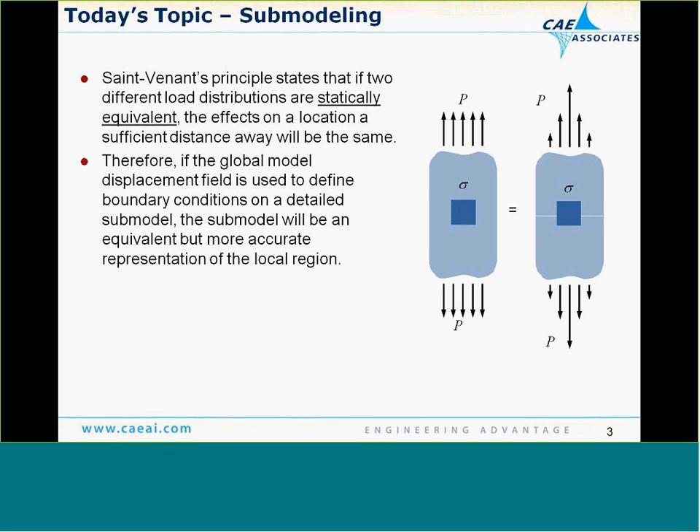Basic characteristics of submodeling, if you're not familiar with it: the submodel is a separate analysis, or separate model, from the global model. The sub typically only includes the local area of interest. So you're going to go to your global result, take a look at a particular region for stress, say, okay, I'd like to get some more resolution in that region, and slice a piece of the model out from that area.

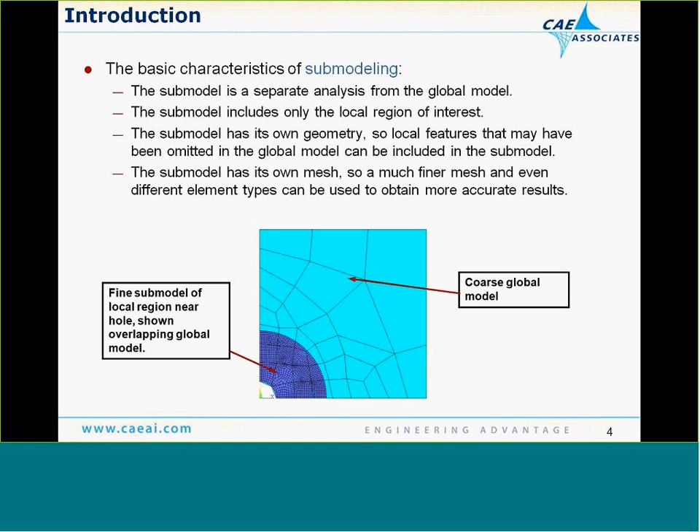It has to be geometrically in the same location because we're going to be interpolating displacements based on nodal coordinates. We're going to remesh that geometry with a finer mesh, interpolate those global displacements onto the finer mesh, and then generate our submodel solution. That's really what we'll be doing today in the presentation.

Submodeling has been available in mechanical APDL, or what we refer to as the ANSYS Classic interface, for a long, long time. Submodeling was possible in Workbench, but prior to the release of version 14.5, it required APDL command blocks to accomplish the cut boundary interpolation. There were two solution phases involved where you had to write out files and then read files back in. It worked reasonably well, and followed the same basic procedure we use in mechanical APDL, but it was a little bit cumbersome.

One of the things about version 14.5 is that they've reduced that effort to simple drag and drop operations. We can have our global model and our submodel inside the same project. That's highly advantageous because we can simply make a duplicate of our global model and then edit that geometry locally to extract the submodel region. Then when we're ready to interpolate those boundary conditions, we grab the solution row from the global model, drag it, and drop it onto the setup row of the submodel. That's what we'll be doing today.

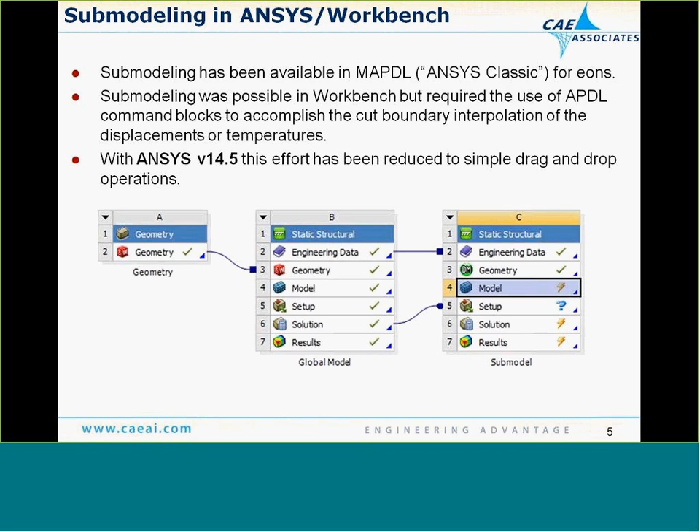The basic procedure for submodeling in the Workbench environment consists of the following steps. We're going to set up and run our global model the way we normally would, then either bring in separate geometry or make a copy of our global model and extract the geometry that we want.

The requirement here is that this geometry has to be in the same geometric location as it was in the global model. We're going to drag up and interpolate the global displacement fields onto the cut boundaries of our submodel, then evaluate the submodel boundary locations. You have to be fairly sensitive to this when doing submodeling, making sure you are far enough away from the region of interest.

So that the cut boundary interpolation of those displacements isn't affecting the localized response. We're going to talk about two different ways to compare force and stress at those cut boundary locations to the global model. There are some nice new tools in version 14.5 which allow you to evaluate that fairly readily. Then, when you're confident that your cut boundaries are in an appropriate location, you can simply go in and evaluate the submodel results the way you normally would with another model.

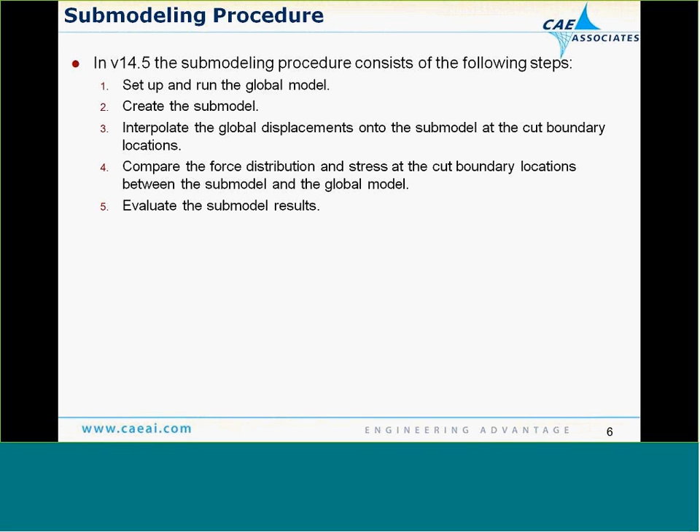In the global model in the upper left, you can see we have a fairly coarse brick mesh, and we have a reentrant corner or sharp edge in the region where we're looking at a high stress in that global result. Now we know based on experience that we can't evaluate the stress accurately in the global model in its current geometric condition, because at a reentrant corner that stress is going to be infinite.

So what we need to do is go back and fill in that region with some geometry, like a fillet radius or tooling radius, something that would actually occur in the real part. The reality is we can't make or manufacture anything with a reentrant corner in it - it has to have some small fillet radius. We need to go back and put that in to evaluate the stress accurately.

On the right-hand corner, we're showing our submodel stress distribution, and we've even switched element type. So we go in, add the fillet, remesh in a much finer state with a tetrahedral element compared to the original brick element, and we're able to share those global boundary conditions to very clearly evaluate the submodel.

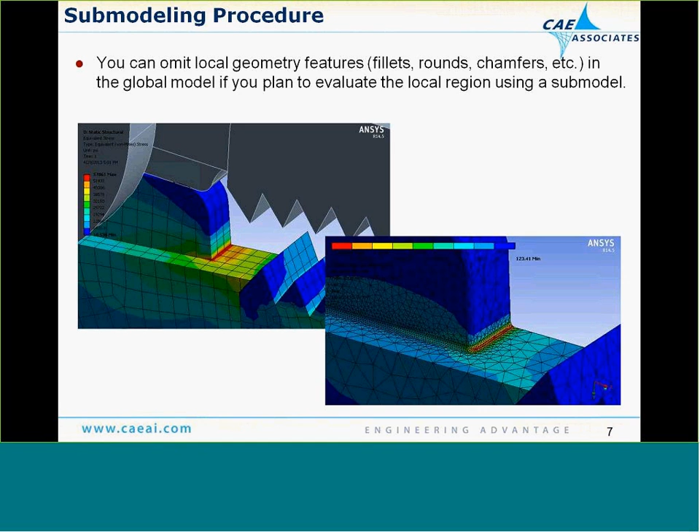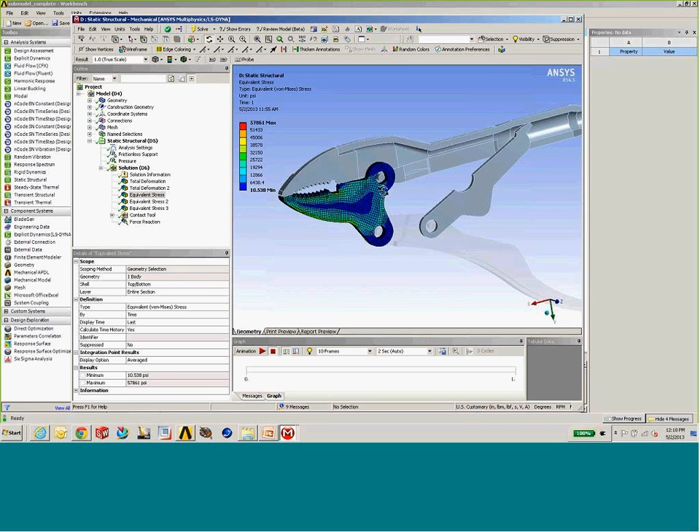So I'm going to go over now to the ANSYS mechanical environment, and let me just bring up my global model here to give you a quick idea of what we're doing. Some of you have seen this before if you've attended our update seminars. We have an assembly of essentially a grip or a plier, and we've applied load to this such that we end up with this high stress right at that reentrant corner where we're missing that fillet.

So my options for evaluating this type of situation are basically two. I can refine the geometry in the global model and regenerate the entire global solution - not really a big deal with this model since it's not terribly large, but for a very big, complex assembly I may not want to do that. I may want to run that global analysis one time and then utilize those cut boundaries to evaluate the stress, and maybe even do a refinement study on a local level using the submodel. That's what we're going to do today.

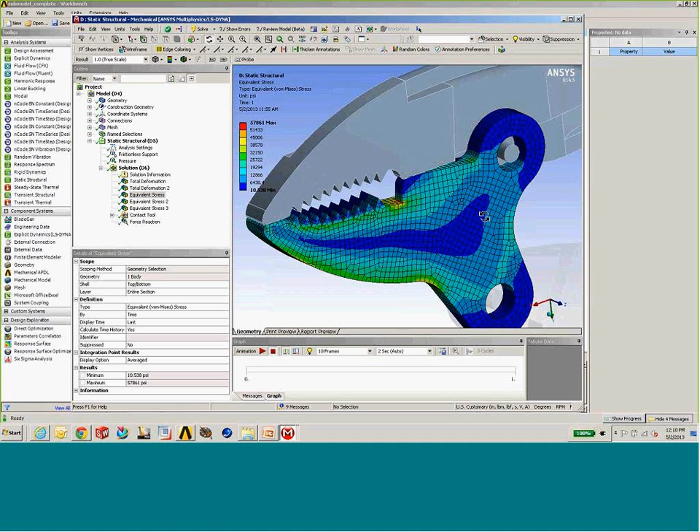We're back to our project page now. On the top, I have my global model solution. In order for me to easily create this submodel, I'm simply going to the geometry row, right-click, and duplicate that system from the geometry level.

Duplicate at the geometry level, and a new system comes up with an independent geometry associated with it. So in this case, I've loaded in a SolidWorks part, as you can see by the little red cube icon to the left of geometry. I could go back to SolidWorks and extract my solid model geometry there if I chose to.

But for me, in the Workbench environment, Design Modeler is far more convenient to do that. So I can work here and edit this submodel geometry locally in Design Modeler. Because there are no links here, I'm not affecting the global solution at all - it's a copy of that global solution.

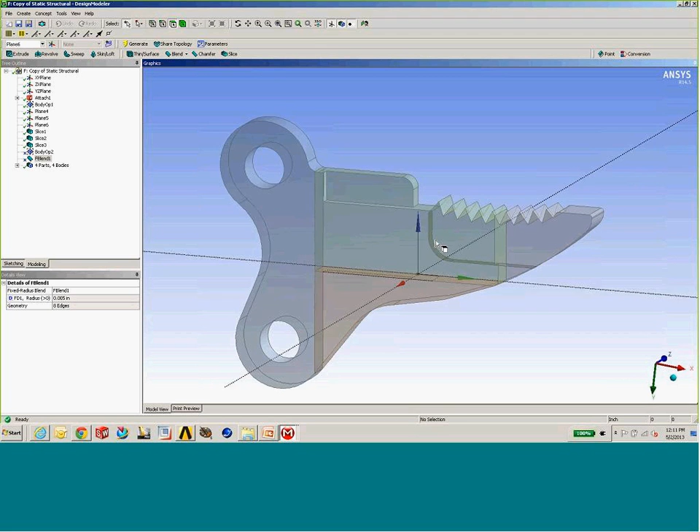I like to use Design Modeler for this because I find it's very well suited for cut boundary extraction. I can simply use planes, or I can use surfaces - whatever I want to basically cut out the region of interest. In this case, I've placed 3 planes and used slicing operations to cut out just the area of my submodel.

I said a little earlier that it's very important that your submodel cut locations are far enough away from the local area of interest, and you may not necessarily know what that is up front. The nice thing about using Design Modeler in this case is each one of these planes can be parametrically defined.

So I can evaluate my initial submodel and determine whether or not those cut boundaries are far enough away. If they're not, I can simply parametrically modify that model by changing the offset value I'm using for my plane, and hit the update or refresh button to recreate the submodel solution.

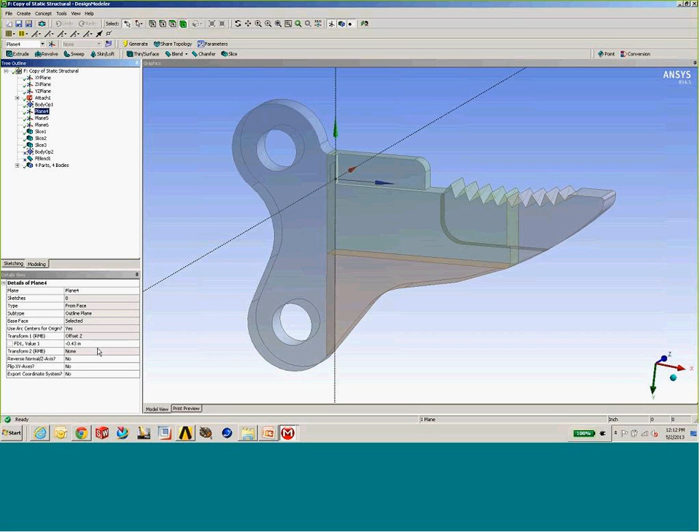Essentially, with one parameter value and one button at the top of the screen, I can very easily refresh my submodel solution and gain confidence that my boundaries are in the right location or in adequate locations. We may want to add some of that geometry in - so if that was a feature you had suppressed on the CAD side, you could simply unsuppress it.

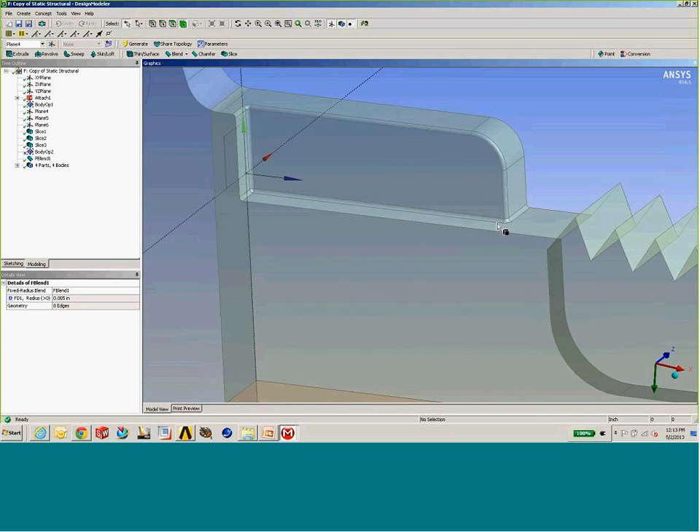I'm doing the same sort of thing here - I'm just going to add in a fillet radius in that little region so that we can evaluate that stress. Again, this fillet radius doesn't have to exist in the global model. That's the whole advantage here of evaluating this stress on a submodel basis.

Returning back to our project page, we have our submodel cut out. Then, to get the connection between the global model and the submodel intact, we simply grab the solution bar, drag it, and drop it onto the setup row of the submodel.

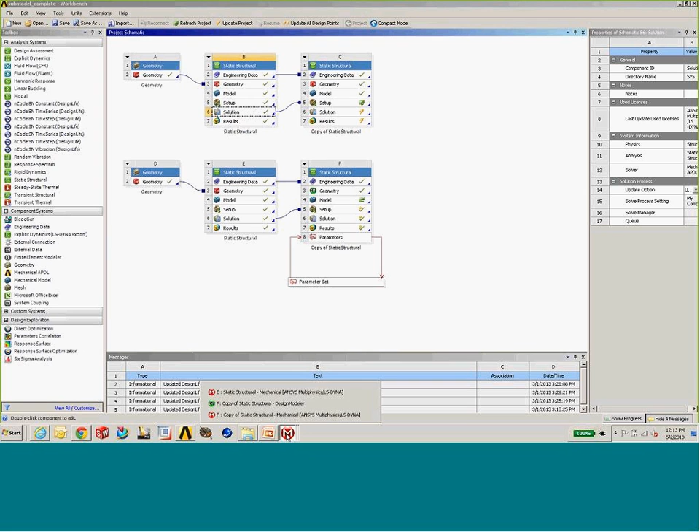When we take a look at the submodel here, we have a submodeling folder located in the static structural solution. That came from the fact that we dragged and dropped the solution from the global model.

One thing I want to point out before we go further is I mentioned comparing forces at those cut boundaries between the global and the submodel solution. ANSYS by default does not save nodal forces in the solution. You can go to the Tools Options menu and tell it to do that by default - I strongly recommend that you do that.

Otherwise, you have to make sure you go to the analysis settings and turn on that nodal force solution for every particular analysis you're going to do. If you don't do this and try to look at the forces on that cut boundary surface, it will tell you that data is not available, and you'll simply have to rerun the analysis and duplicate what you just did. So again, I strongly suggest you turn on the nodal forces as a default - you'll find that up in the Tools Options menu for the mechanical environment.

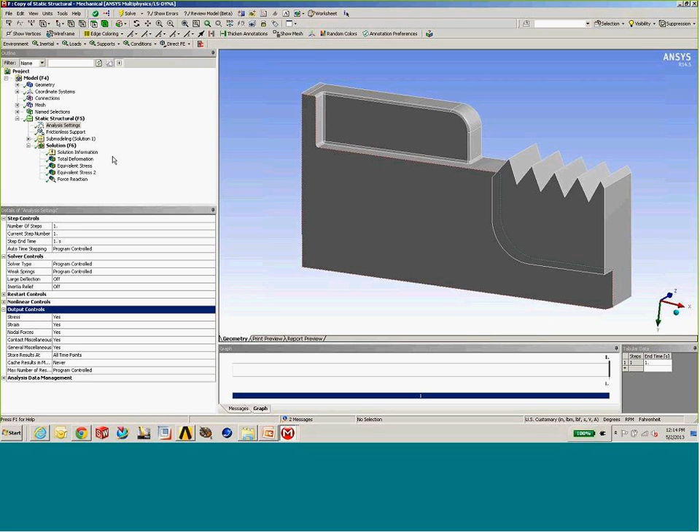So we're now going to start interpolating those boundary conditions. We go to our submodeling folder, right-click, and choose to insert either a body temperature or displacement. Body temperatures would come from a global thermal analysis where we needed to get the thermal load onto the body. In our case, we're going to be interpolating or bringing across displacements on those cut boundaries.

I've run that for a couple. It's important, in addition to saving those nodal forces in the solution, that you apply the cut boundaries on the individual cut boundary surfaces as individual displacement imports. For that, we're going to look at the total force, or F sum, of that particular displacement load. We don't want everything summed together from the different cut boundaries—we'd like to see it individually on each one.

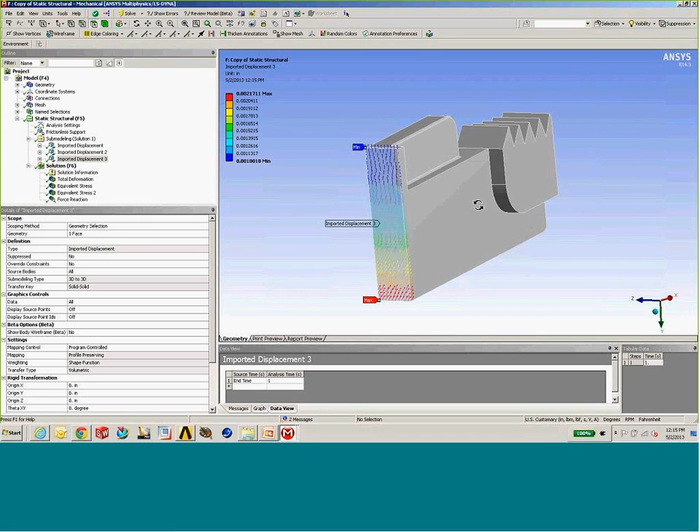So I've gone through and imported each one of these cut boundary solutions, or cut boundary displacement fields, onto my finer mesh from the global model. Now, to check the validity of that interpolation, there are a couple of mapping controls you can use. You can change from program controlled to manual, and set some of the different options for bringing in that mapping if you find it's not mapping those loads the way you intended.

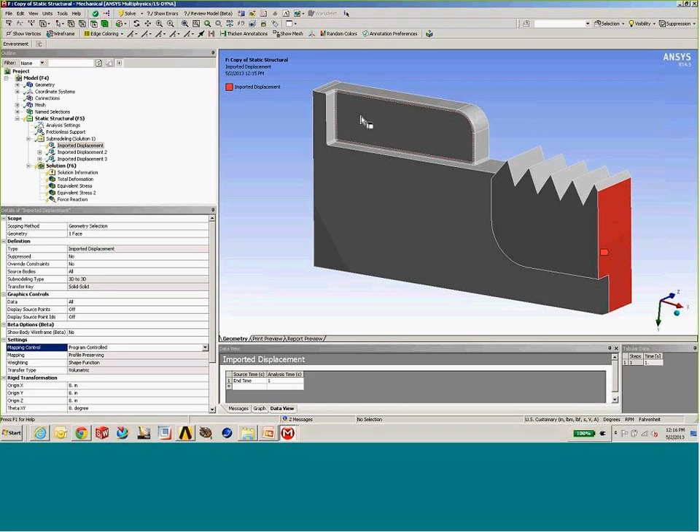So we put our cut boundary displacements on. We also have to make certain that any other boundary conditions that existed in this region of the global model are also applied to the submodel. My only one was a frictionless support on the back side, because I had made a copy of the original global geometry and extracted the submodel from it. That frictionless support is added for me automatically because that face tag is the same.

If we were using a separate model from the CAD system, you want to make sure that you go through each one of the boundary conditions. You may have pressures applied, or, as we saw, temperatures or body forces applied. You want to make sure that anything that existed in the global model also exists in that same location of the submodel.

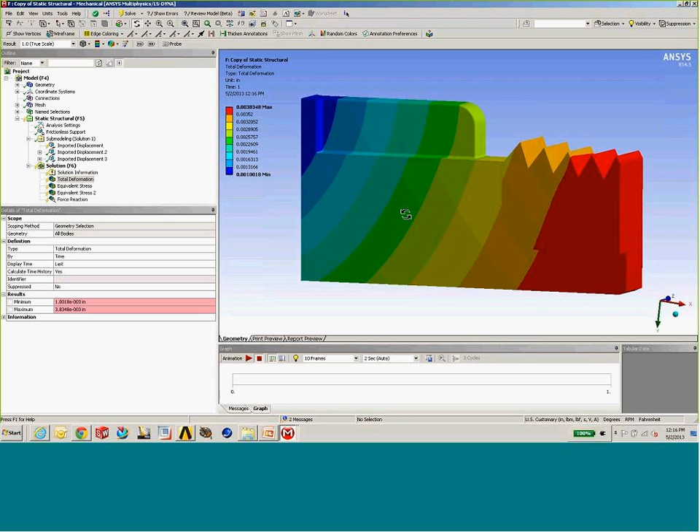Submodel solution—we can take a very quick cursory look at the displacements and compare to the global model for that region. But of more use to us is determining whether the force response at the cut boundaries matches between the global and the submodel. We do that by inserting a reaction probe.

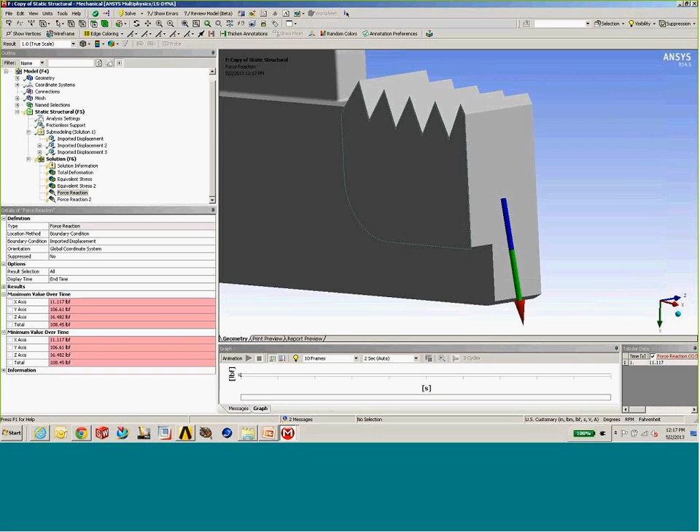It's simply a right-click, insert a probe, in this case for force reaction, and then you'll see the various displacement loads you can choose from. We have that here, and we can see we have a total force. We get a force vector on the front of this cut boundary number 1, and we have a total force of about 108.45 pounds. Let's go now and compare that to the global model.

Shrink the submodel down a little bit, move it over right here, bring the model back for comparison—actually, let's make it a little bigger here. Now there's a bit of a dilemma, because you'll notice there's no mesh boundary in the global model that matches the submodel. The cut boundaries in this case don't exist in the global model.

Sometimes you can set things up so that's what you want to have happen, but in most cases we don't really know where those cut boundaries are going to be. So what we need to do is find a way to interpolate the forces onto the location where we placed the cut boundary. We got it at 14.5 using construction geometry.

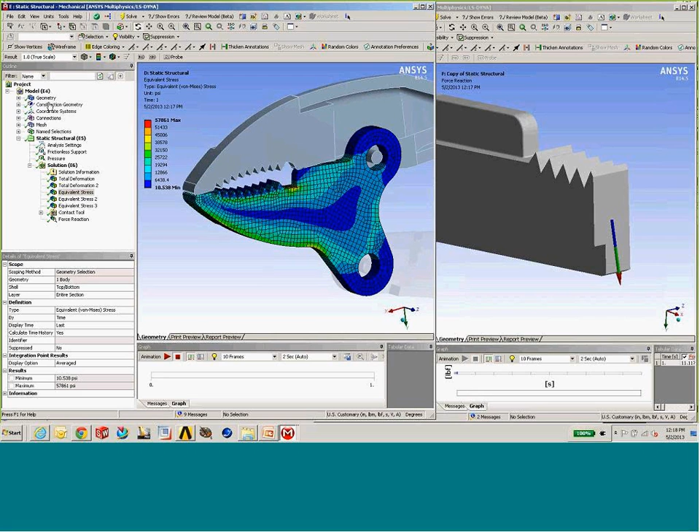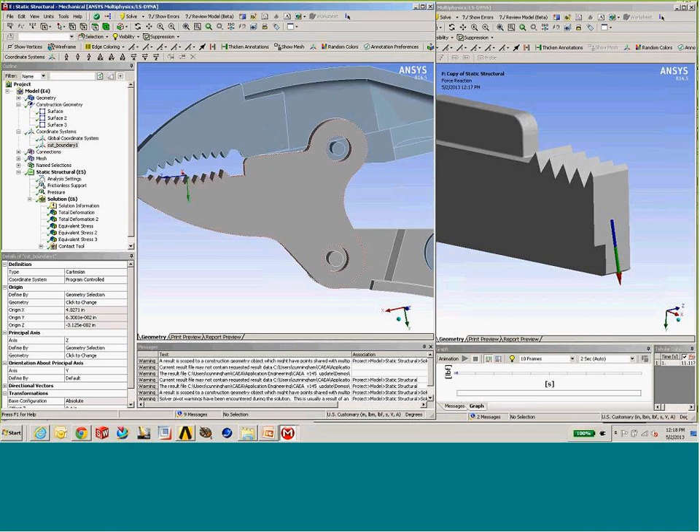Construction geometry is usually found up on the toolbar. When you add it to the outline tree, you'll have access to it, and you can right-click and insert a path or a surface. In this case, we're going to insert a surface and align it with a particular coordinate system—a coordinate system here called cut boundary number 1, at that same location as the cut boundary in the submodel. I simply align the surface with that particular point, so now I've got the surface in place.

Now I can interpolate stresses and forces onto that surface. The force interpolation is something new at 14.5 that makes it easy for us to check and compare these boundaries. We get that by, once again, right-clicking and inserting a probe for force.

Make sure that you've saved those nodal forces during the solution, otherwise you have to regenerate the global solution as well. In the place of a boundary condition scoping, scroll down to the bottom and you'll find that they now have the surface option available to you at 14.5. We select the surface that we want to use.

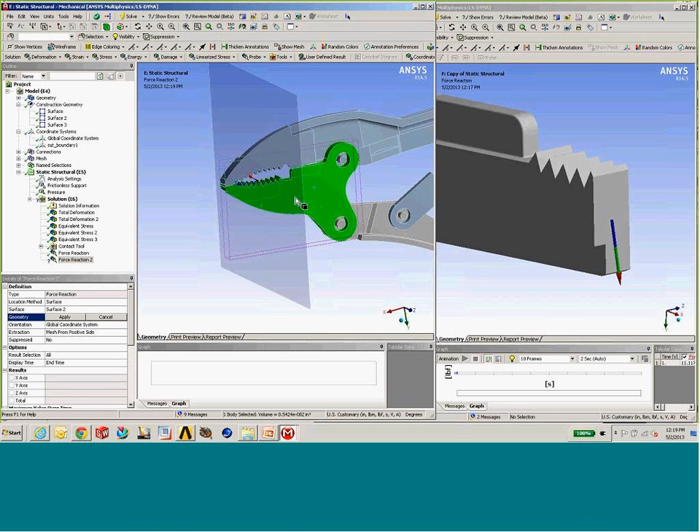In this case, we use surface 2. Add a cut boundary, and tell it what geometry we want the forces from. We're going to pull the forces from this body. If we're doing a force summation through the mesh, we need to tell it whether those forces are coming from the positive or negative side with respect to the normal direction of that plane. We'll just leave the positive side, since they're equal and opposite in this case.

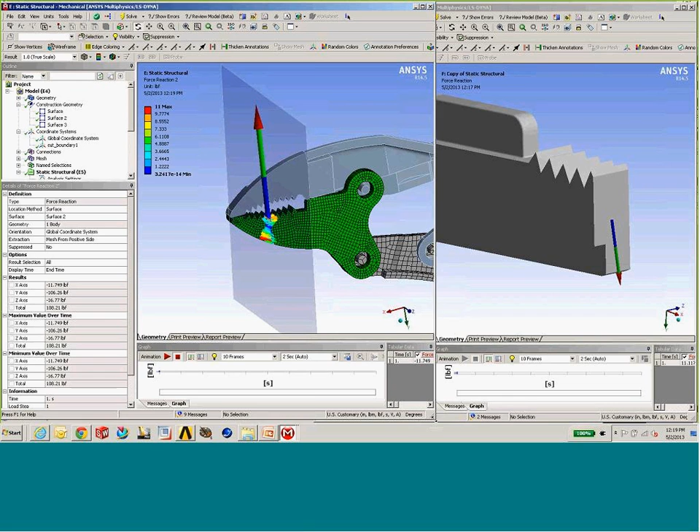If we right click and evaluate that, we can take that force response and drag it over here so we can compare. In the global model, you can see you get a nice pictorial distribution of the forces along that edge for that face.

You get the total vector. In this case, it's equal and opposite to what I was showing on the solid, because of the side that I picked. But when we look at the total force, or the SRSS of those forces, we can see that the maximum value is 108.21, which is pretty close to 108.45.

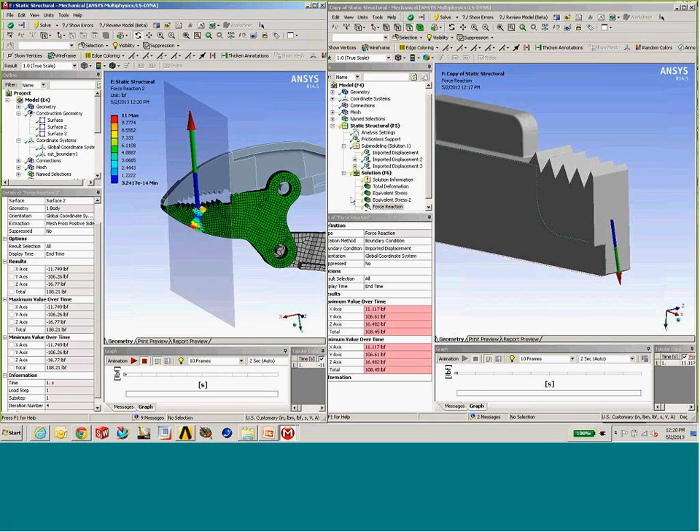So I think we're within some computational error there. We don't need to worry too much about moving that cut boundary. That's a way to check and make sure your forces are adding up correctly on both the submodel and the global model. We can also compare stresses on those locations.

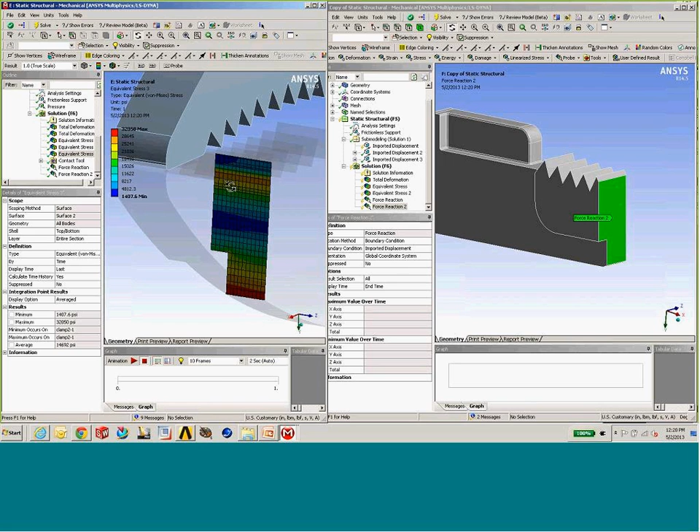So let's go back here. Actually, I invalidated my solution, so I don't have a stress response. But we can also scope a stress to that surface, and then go back and compare to see that the stresses are similar in both magnitude and distribution. So I'm just going to pop a PowerPoint document back up here.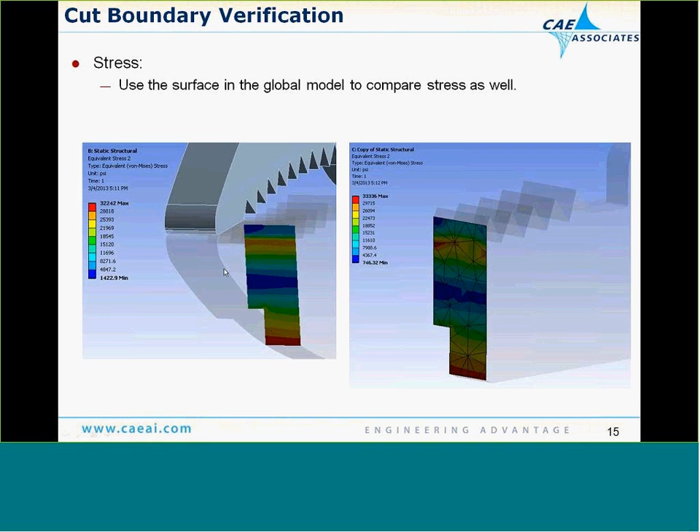And again, using a hexahedral versus a tetrahedral mesh, I may refine the mesh a little bit further on my submodel here and get a more matched response with that global model. So that's basically the procedure that you use.

The important items to keep in mind are: make sure you've saved those nodal forces during both the global and the submodel solution. If you can, put the boundary planes in one geometry model—if you're using Design Modeler, place them up at the very top in the beginning of the process—and then you can very simply grab those, make sure you import them into the global model on the mechanical side, and use those to do the surface interpolation. You always have the option to just recreate a coordinate system in mechanical to evaluate what's happening on those cut boundaries.

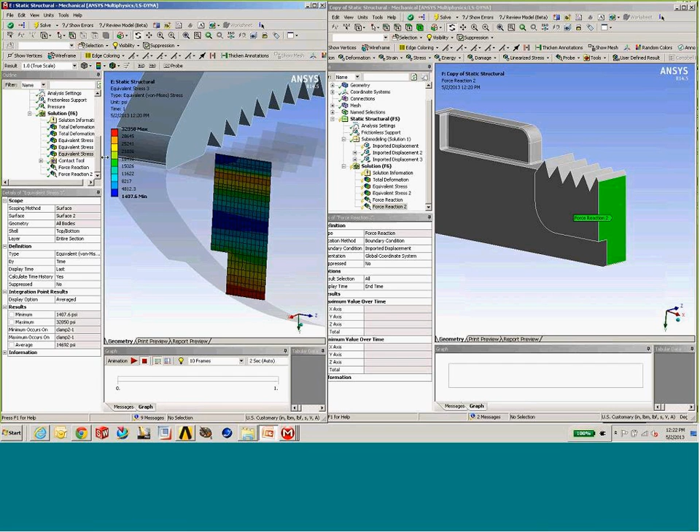One thing I wanted to show you here, once we're back to that submodel stress and happy with that cut boundary location, we want to go in now and automate a mesh refinement study to make sure that we have a sufficient number of elements in the submodel to capture the response that we're interested in.

Then we can take advantage of the parametric nature of the workbench environment. I specified that my face sizing, which I applied in that global fillet region, is parametric, and I went over to the design table and specified a couple of different mesh sizes, then kicked off an automatic run where it just loops through, changes that element size, redistributes those cut boundary displacements, and generates the submodel solution.

As I decrease the element size in that region, my stress eventually levels off to a point where it's not sensitive to the element size I'm using in that area. In the past, we would have to do this manually by changing and checking repeatedly. Now I can just set up a table, kick off a couple runs, and evaluate for myself if I have a sufficient number of elements in that region.